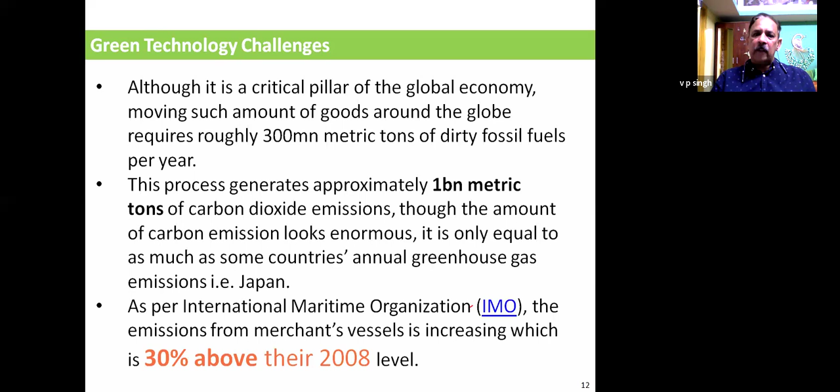But still, the International Maritime Organization is taking a very proactive step to reduce the emissions, and they want to maintain it at 30% above the 2008 levels. They have created a timeline that by 2050 this industry will have zero net emission, so that the global rise in temperature is kept to not more than 1.5 degrees.

As we are moving towards that, this is the timeline: we bring it down by 20 to 30% by some point, and 70 to 80% by 2040, and net zero by 2050. Now, how do we reach there?

Right now, presently, what they are doing is gathering data from ships and trying to reduce consumption. One of the very effective, cost-effective measures is slow steaming, where the ship speed is reduced. Studies show that if you reduce speed by 25%, consumption goes down by 58%, meaning greenhouse gases will be reduced by 50% for that particular voyage.

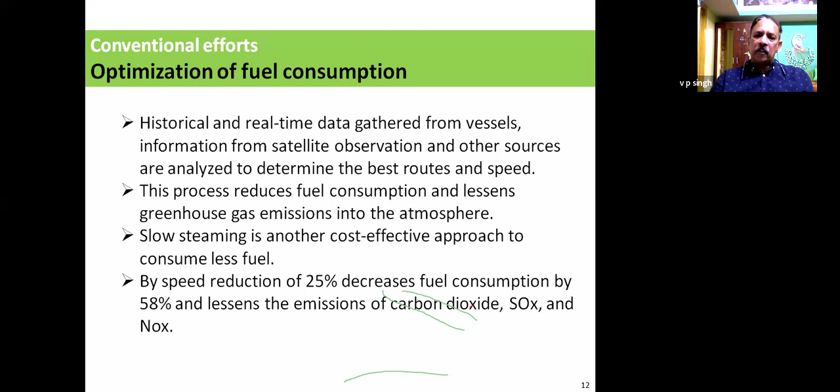So it's an effective way. These measures are already being put in place and are being worked on. Plus, newer technologies are being explored and researched, and it has to be synergized between the engine manufacturers, the shipbuilders, and the ship owners.

Now there are alternative sources of energy. One of the main sources was LNG, LPG, hydrogen, ammonia, methanol, and even solar. Solar is not that feasible, but wind power - there have been some trials in Japan and even in Europe for using sails, but it is still in very early trial stages only, just prototypes being tried on.

And most important is the reliability of the vessels, because what happens if certain goods and services don't reach in time for usage - then there will be a big challenge to the countries and to humanity.

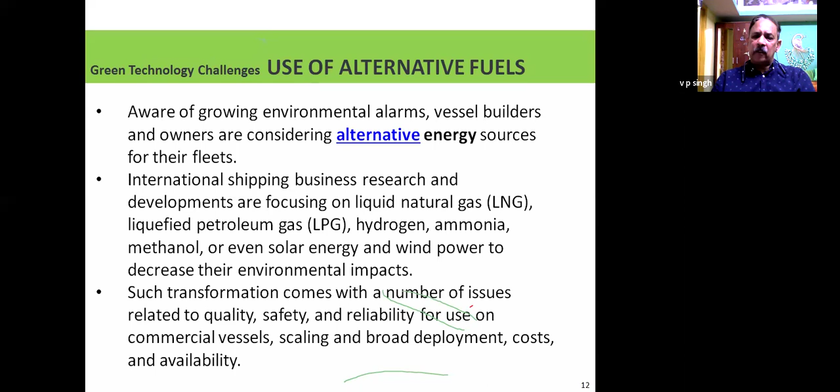Now, zero carbon fuels - what we call zero carbon fuels - hydrogen is one, but hydrogen has a very low energy density. It is almost 25% of the fuel oil, the gas oil.

That means it has to carry almost 4 times more for the same power requirements. Ammonia is another which has been tried on prototypes. But there is a toxicity factor in this, so there will be safety and environmental concerns in ammonia.

Green methanol is another good option. It has power density about 60% of the fuel oil, diesel oil. So we'll have to carry more methanol per ton mile requirement. And also within the vessel crew, the engineers and navigators will have to be retrained in using these new sources of energy. So training infrastructure also will have to be developed.

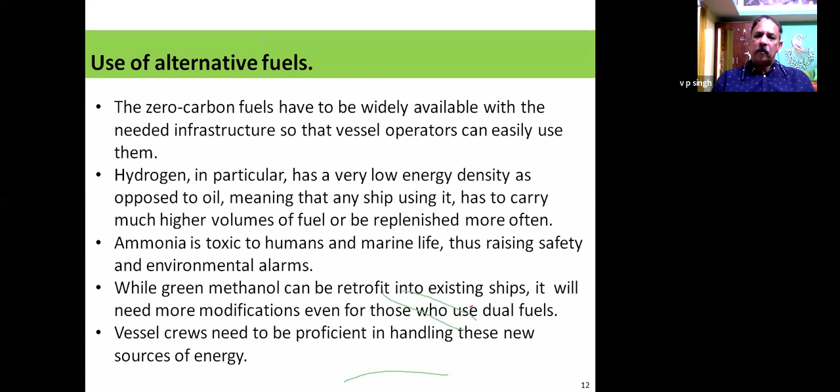Now we have alternative fuel. Here is the chart for alternative fuel, where the MGO, the specific energy of marine gas oil, is 42.7 megajoules per kg. Now LNG is a good option, but LNG has a temperature storage issue. The temperature is minus 162 degrees. It has to be stored at atmospheric pressure. So those challenges are there. But its energy is high, it is 48 megajoules per kg. So in fact it is a good source.

Now LPG is another source, but the same problem of low temperature storage, and energy density also is close to the LNG. Ethane also has similar challenges of very low temperature storage required, or high pressure.

Now methanol. Methanol is one of the good fuels. The existing storage conditions can be used. But here the problem is its specific energy is only 19.9 megajoules, which is almost 40 to 45% of the MGO. So our storage capacity will have to be increased to meet this requirement for methanol.

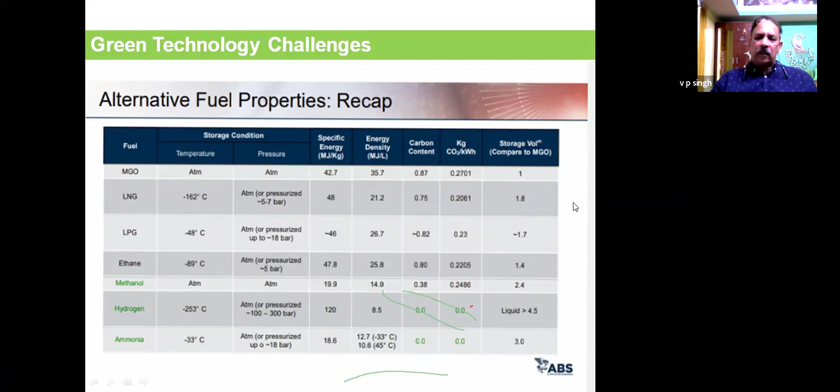Ammonia also has a similar issue, but it has an additional problem of toxicity. It is unsafe for the humans around, and environmental issues are also there. It has a low temperature, and the storage volume for ammonia also requires almost 3 times more compared to MGO, as you can see in the last column. So these are the fuels which are right now being tested and worked upon, and progress has been made.

There has been a German energy agency study that 95% of carbon emissions could be saved if hydrogen were to replace coal in blast furnaces in the steel industry. But this hydrogen has the same issue, because hydrogen production also requires electricity, since through electrolysis the hydrogen is generated. So for that, new technologies are coming in, and they are working on this green hydrogen technology.

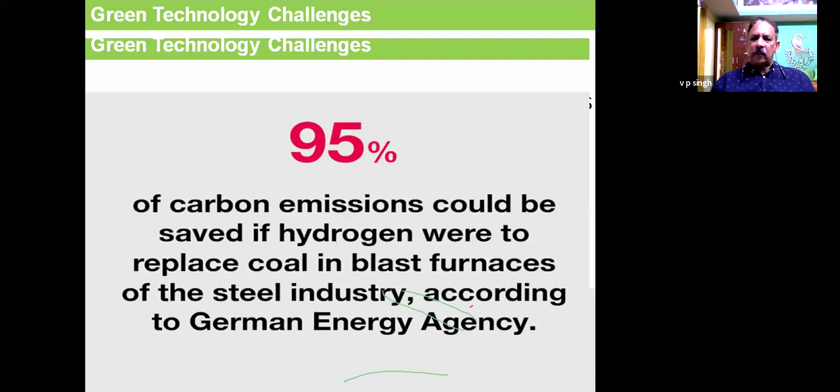Now, for green hydrogen technology, there is a proton exchange membrane, which helps in electrolyzing hydrogen faster. It has higher efficiency, and it operates at lower temperature and pressure, unlike the usual electrolysis for hydrogen.

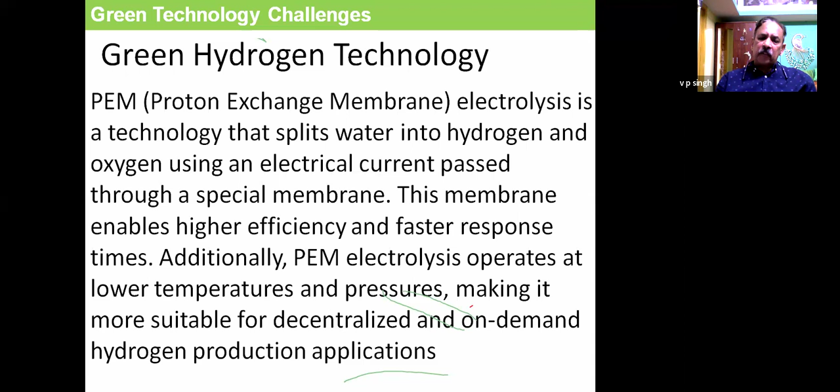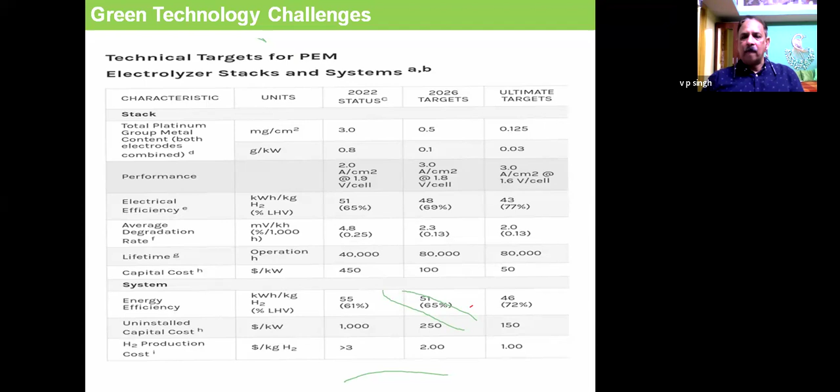Now next, there are 2 major engine manufacturers in the world for marine engines. One is Wärtsilä and one is MAN. They are also already catching up with the new technologies. In 2022, they had launched a Wärtsilä methanol engine commercially.

By 2023, they have added 4 more engines. Gradually it is on trial basis and prototype, and they are working on it, and I'm sure it will become the need of the hour. Right now the world shipping has more than 50,000 ships, so imagine the kind of capital cost required for new building and renewal of the world shipping fleet.

Now, Wärtsilä also did work in ammonia as well. They have launched a 4-stroke ammonia engine, and this ammonia cuts the greenhouse gases by 70%. This new engine will help ship operators address decarbonization pressure, but it is a stopgap arrangement.

It is not a total solution, because the aim of the International Maritime Organization is zero emission. So this is only on the path to achieving zero emission. It cannot achieve that, because here still almost 30% greenhouse gases will get generated for the same requirement.

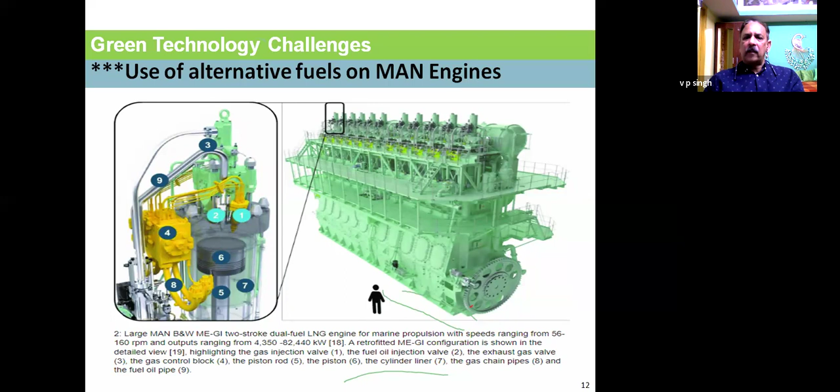Now, MAN has done one more study on biofuel, mostly methanol it must be. They have done a study on biofuel, and this ship is already running, and it's a comparative study. The VLSFO is a very low sulfur fuel oil.

Like we have high-speed diesel, where our sulfur weight is less than 0.5, less than 0.1 actually percent. So they have done the study. If you see VLSFO density is 940, here also density is 921.

Viscosity of VLSFO is 98 centistokes, whereas viscosity of biofuel is 16.6 centistokes. Sulfur is 0.5% for VLSFO, whereas biofuel has very low sulfur. This is good actually, because sulfur in fuels can cause acid rain.

That is why the sulfur has dropped from when I started working. The sulfur used to be almost 5% in fuels. Now it is less than 0.5%. So there has been a 10 times reduction in sulfur.

The calorific value of VLSFO is 42.1 megajoules, but for biofuel it is close to 35, ranging 35 to 42.

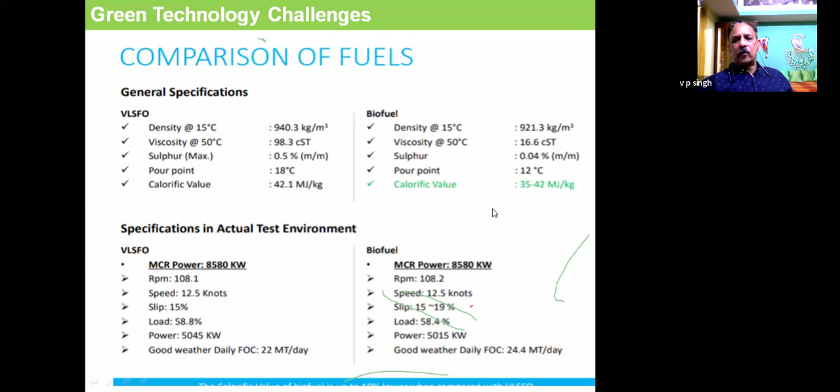So biofuel is a very good option for the intervening period, because as long as the fuel has carbon in it, like methane, ethane, or ethanol (C2H5OH), we will have carbon dioxide being released into the atmosphere. So the idea is to take out the carbon from fuel, and that's where hydrogen, especially green hydrogen, comes into play.

Now, one of the newer technologies, which is a no-go area for most commercial shipping, is nuclear technology. I think that has not more than 2-3% greenhouse gas emissions, actually close to zero. The fact is, it has to be factory fitted from the shipyard, it cannot be retrofitted. It can provide tremendous power, it is scalable, construction is modular, and there is no refueling.

The replacements are there, the fuel rods have to be replaced. It has a high power density, power to weight ratio is excellent, so there will be savings in dead weight, meaning the ship can carry more cargo.

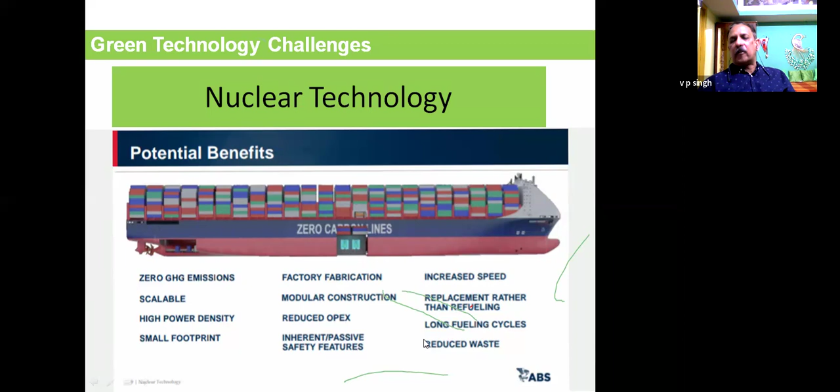Its operating costs are reduced, OPEX is lower, long fueling cycles, once fueled maybe for 2 years. It has a very small carbon footprint. Now, safety factors, because it has radioactive material, there are safety issues, and they are a challenge to nuclear, and the wastage is there. There is hardly any waste, only the fuel waste will be there, and that will not be a very huge amount.

Now there are challenges to nuclear. First is safety, risk management has to be there, safety considerations have to be there. Then regulatory challenges would be there, because nuclear is a very touchy and risky thing, so international atomic energy agencies will be involved, International Maritime Organization will be involved, the flag state - meaning the country the ship belongs to - and the coastal state.

Suppose a ship which is registered in America, a nuclear ship - now a lot of countries have regulations that don't allow nuclear ships to come to their shores. Like even in the Suez Canal, I have experienced that they don't allow nuclear ships to pass through. So it is a challenge.

Operationally, there will have to be new regulations coming in. Nuclear maintenance will be highly specialized, it cannot be done everywhere, terminals have to consider this. Crew has to be specifically trained to handle nuclear energy. A ship's life is usually 20 to 25 years, so when the ship is being scrapped, how is the nuclear plant disposed of or taken care of? Plus there is spent fuel - spent fuel becomes highly enriched uranium, so how to take care of that, all that will be there.

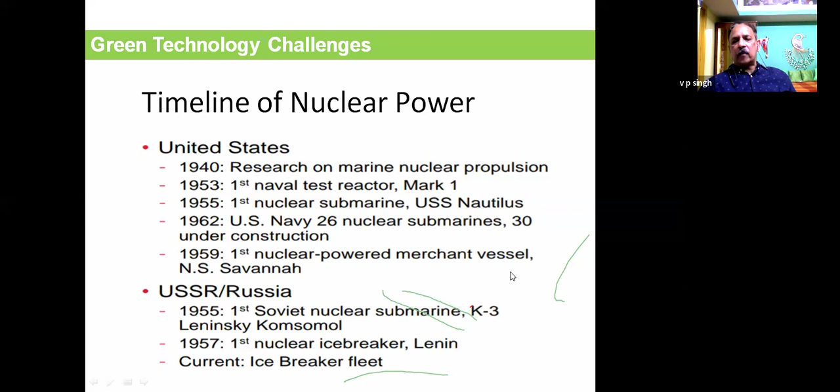Now there are types of reactors which can be used in marine conditions. One is a small modular light water reactor, where the coolant is water and the moderator is water. Moderators are the ones which keep control—they are basically the control for the reactors. Fuel is a low enriched uranium in the form of ceramic pellets.

Now, sodium fast reactors: here the coolant is sodium metal or sodium potassium combination. Moderator is not required because sodium itself acts as a moderator. The fuel used is high assay low enriched uranium, HALEU.

Then lead fast reactors, where the coolant is lead. Moderator is not required because lead is a good absorber of neutrons and protons, so lead is able to control and prevent the reactor from running away. The fuel is the same, high assay low enriched uranium.

Another type is the fluoride high temperature reactor, FHR. Here the coolant is a fluoride molten salt. The moderator—because the salt is not able to control the neutrons and protons—needs graphite rods, which absorb the neutrons and protons and prevent the reactor from running away. The fuel they use is tri-structural isotropic, called TRISO fuel.

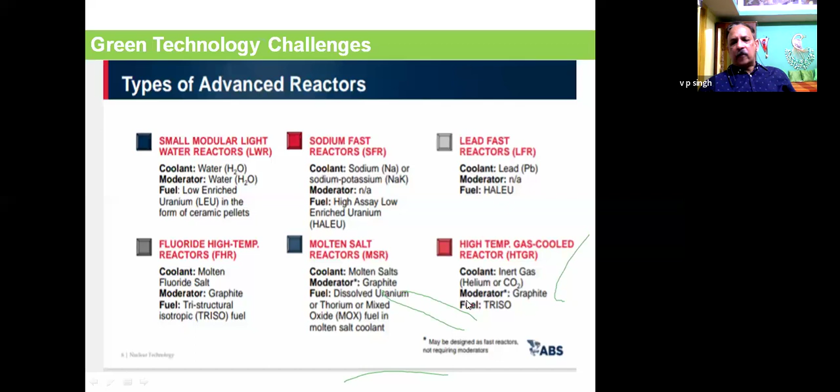This is one. And now they have heat pipe type reactors, a category of reactors. There can be 1 kilowatt to 30 megawatt reactors which can be fitted on a flatbed truck not more than 10 to 15 meters long, and it produces almost 30 megawatt of power, which is a huge amount.

Then we have 20 to 300 megawatt small modular reactors, because most ship requirements fall between 5 megawatt to 80 megawatt. The biggest ships right now, like the container ship that got stuck in the Suez Canal, have almost 80,000 to 90,000 kilowatt, that is 80 megawatt, power requirement.

Then there are the bigger reactors which commercially cannot be used for marine purposes because they are meant for power generation up to 1,600 megawatts. So those are not suitable. Ours is mostly the small reactors and small modular reactors—this is the type which can be modified for marine use.